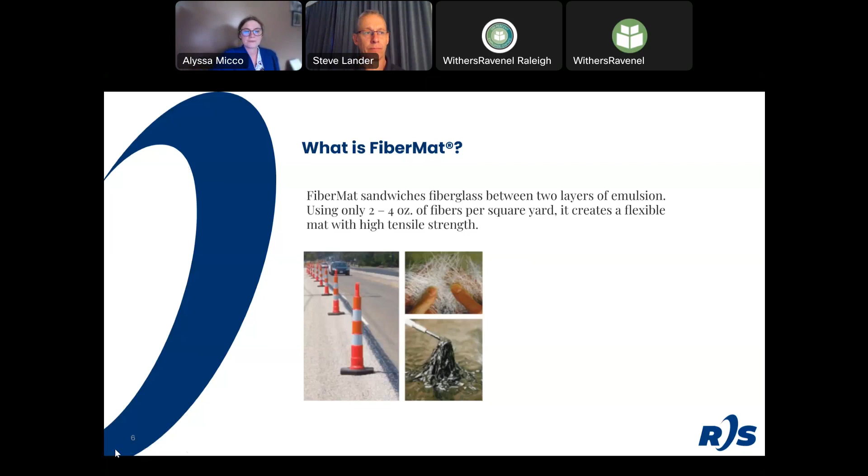So, some applications. Where'd my little button go? There it is. Okay, so what makes FiberMat super unique, in my opinion, is that there's two ways you can use it.

There's the type A, which is a super absorbent membrane, or SAM, and that's just when you have a chip seal as your wearing course. This little demonstration on our left is of a type A, and you can see the emulsion or the binder, the chopped fiberglass, the binder, and then the aggregate. Typically we see aggregate sizes about 1/8 to 1/2 inch, and anywhere in between. Anything you'd typically use for a chip seal, you can use for a type A FiberMat. This is a really nice way to extend the longevity if you have a lot of chip seal roads and want more life out of them.

Then we have a type B FiberMat, or we like to call this a SAMI, which stands for super absorbent membrane interlayer. This is when you use the FiberMat as an interlayer instead of a finishing course. So again, you're going to have your emulsion, fiberglass, and emulsion sandwiched together, and some aggregate, but this is not applied as heavily. It's applied between 15 to 17 pounds per square yard, so it's kind of salt and peppered onto the emulsion layer.

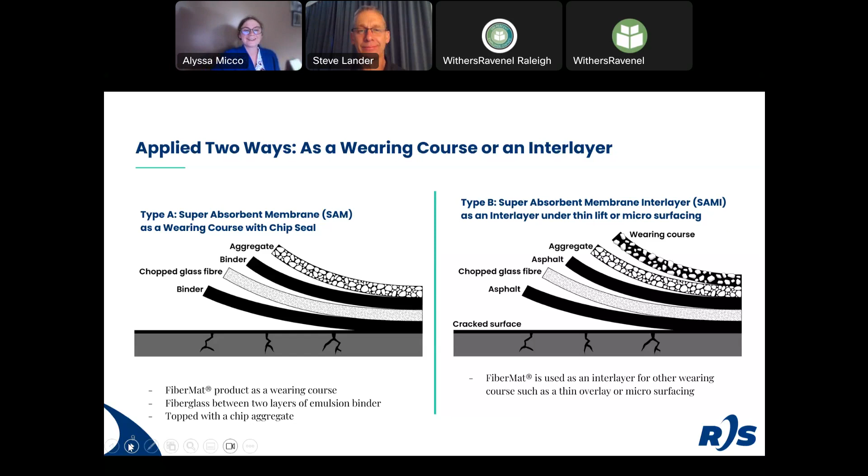I want to talk about this case study. This is about a 13-year-old case study done in Murray, New York, and it speaks for itself. This was done with a type A FiberMat, so this was FiberMat as a finished course. There is nothing on top, no thin overlay, no Micro.

So this study indicates it's time for a shift in thinking. Instead of talking about your cost per square yard, we're going to talk and think about your equivalent annualized cost. If you guys want more information about that, you can email me after the presentation because there's a spreadsheet I can send you, with most of the information coming from roadresource.org. But let's just dig into the case study.

Standard has over 10 years of performance data of Groth Road in Murray, New York. The project was completed in the fall of 2003 and provided us with a side-by-side proving ground in a location with cold winters and warm summers, so we have a lot of freeze-thaw cycles in Murray, New York. Serving as a control lane, one was treated with a chip seal with a life expectancy of 5 to 7 years, and the left lane was treated with a type A FiberMat with a life expectancy of 7 to 10 years.

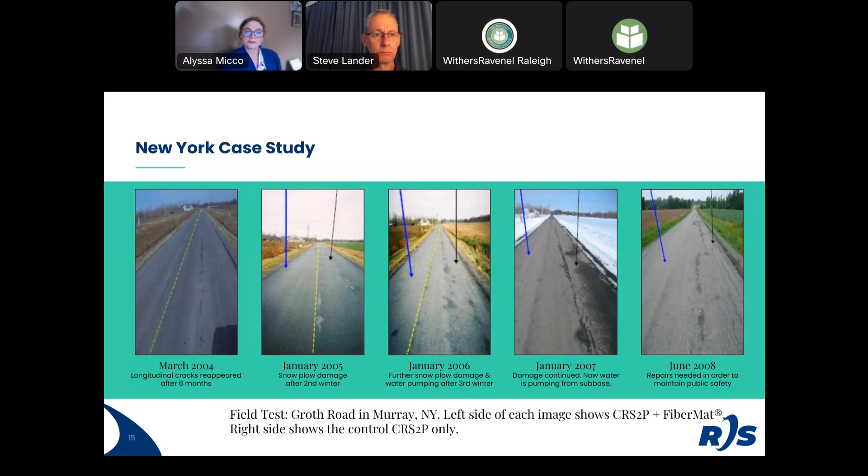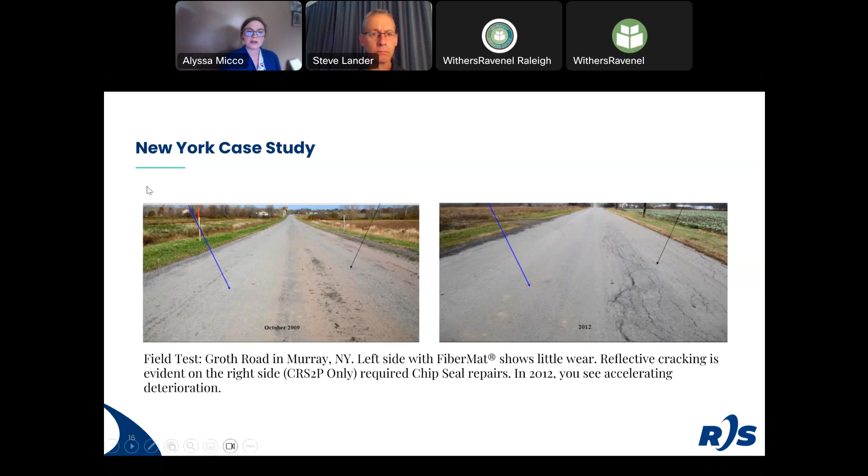So our left lane, the application started in 2003, and the emulsion we used was a CRS2P and FiberMat. Then in 2014, we got a Nova chip and some minor crack seal. The exact cost I'm not sure offhand, but I'm sure it's far less expensive than our right lane, which started in 2003 with a CRS2P.

Then in 2009 we needed to do chip seal repairs, and then in 2014 we did Nova chip with some crack seal. So just the addition of this chip seal in 2009, we totally avoided with the FiberMat, which is going to save your agency money in the long run, which is good news all around.

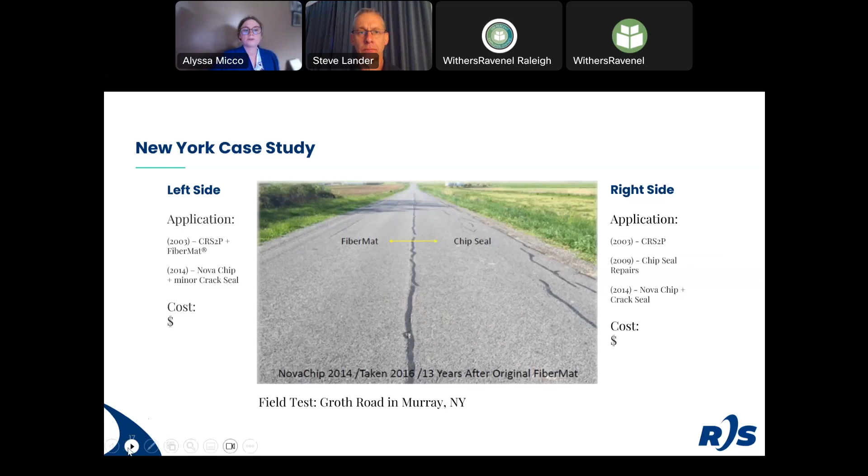We have some additional research available upon request. It's the full in-depth study from Texas A&M with their TTI overlay tester. It's a lot to look at on a slideshow, so if anyone would like any additional research, please feel free to reach out.

We saw improved cracking resistance 3 to 4 times more than our control sample. And larger FiberMat samples, with a larger interlayer, survived 14 times longer than our control samples did. So if anyone wants the full in-depth schematic of the TTI overlay tester and everything, feel free to reach out and I'll send that to you.

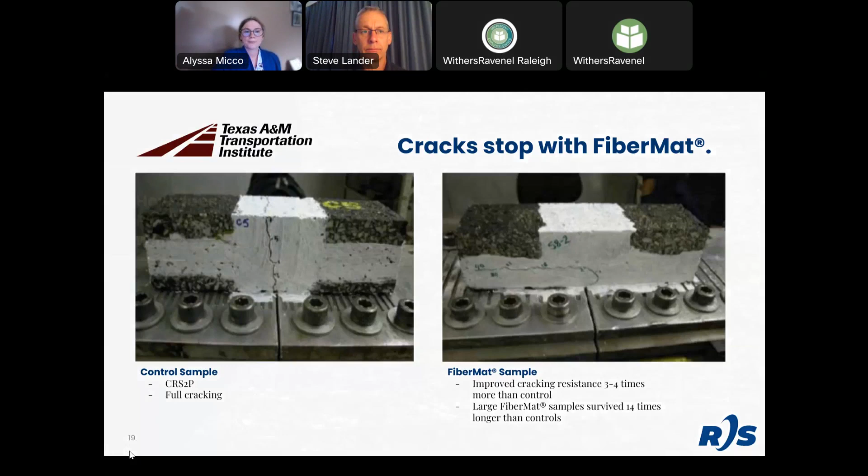So we talked a lot about the cool side of FiberMat, the case study, what it is, but how does it work?

Well, it starts with your site selection. A good road candidate for FiberMat is roads of all traffic volumes.

In 2005, I want to say, NCAT used FiberMat as a test subject on Highway 280, which is a high ADT road. It connects Opelika, Alabama to Columbus, Georgia. There's a lot of traffic from the airport going into Auburn, and a lot of heavy truck traffic because of logging routes. They put FiberMat on 280 and it withstood a lot of traffic.

Then in 2023, I was in Opelika, Alabama, and we put it on State or County Road 179. It was a lower traffic volume, but it served its job and it is still crack-free to this day.

FiberMat's great for going over concrete or milled surfaces, and you don't need a scratch course for it to go over like you would with a typical geotextile. We always recommend any potholes or cracking larger than an eighth of an inch, and any wheel rutting, should be corrected before the FiberMat goes down, because FiberMat's going to increase your tensile strength and flexibility and reduce reflective cracking. It's not going to fix your base issues because it is a surface treatment.

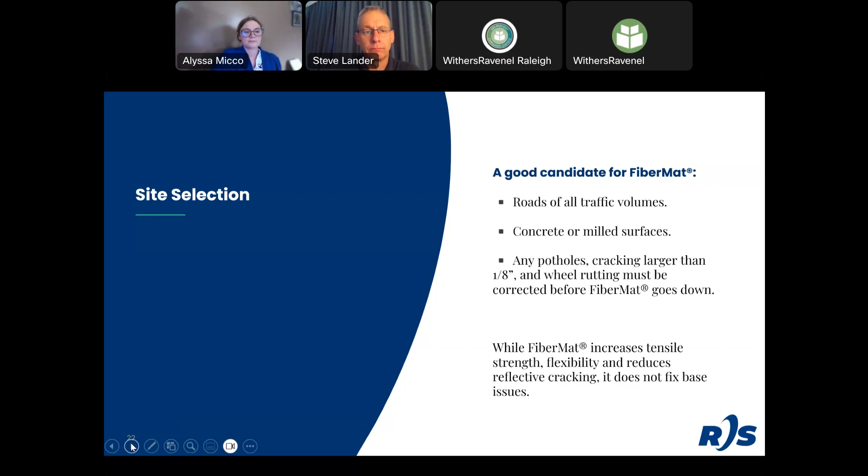How is FiberMat made? Well, the FiberMat machine simply sandwiches the fiberglass in between layers of emulsion. There's a computer-guided system that cuts the fiberglass mat to its ideal size. Then the aggregate is immediately placed and rolled over top.

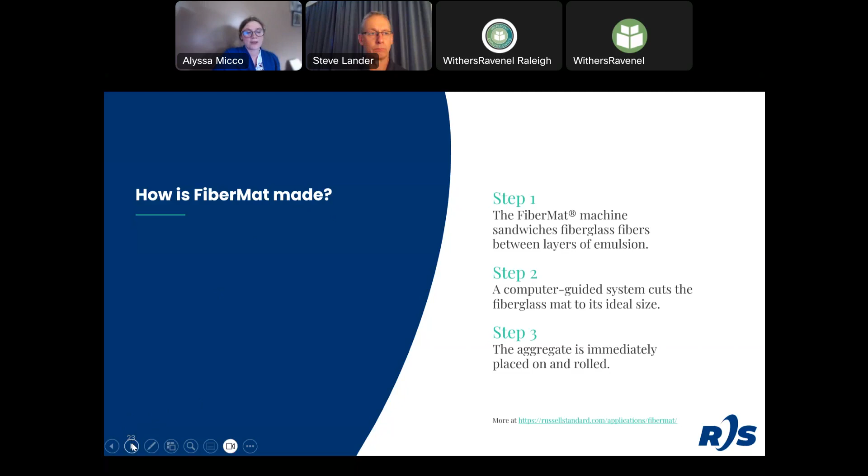We always recommend, if you're working in North Carolina, following NCDOT's best chip seal practices because they are tried and proven true and a great complement for FiberMat. If you guys want to get more in depth, follow the link for Russell Standard's site, hit all applications, and scroll to FiberMat - there's a video that goes in depth over cutting bars and the computer-guided system.

I have this screenshot from the video just to explain the specialty of the FiberMat buggy. So we have a spray bar that delivers half of your emulsion, then cutting bars, or cutting wheels, for the fiberglass, and then a second spray bar that gives the second half of the CRS2P or CRS2L emulsion. The shot rate for FiberMat is about the same as your normal CRS2P, but this system just breaks that in half so that the fiberglass gets covered up.

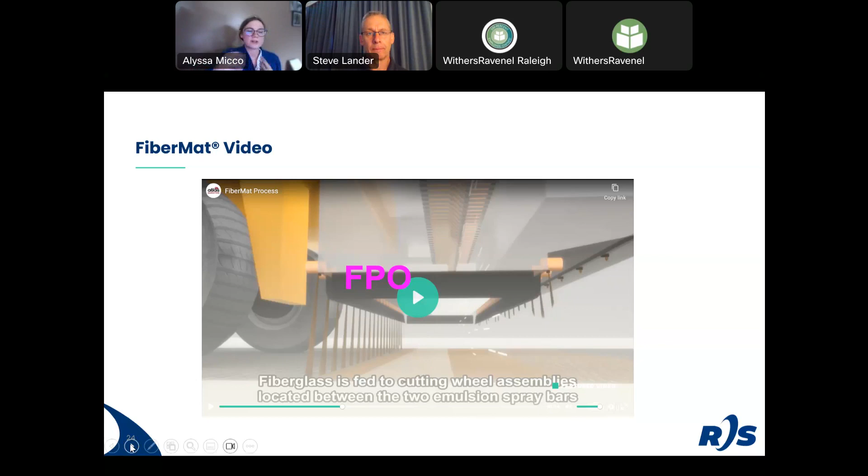So what materials would you need? Anything that is a CRS2P, 2L, CRS1P, or 1L. I know some states don't necessarily use polymer modified, and that's okay - we use latex modified in North Carolina, and it works just as well. The aggregate typically used is about 1/4 to 1/2 an inch. The fiberglass we will provide as contractors.

The FiberMat machine, which we provide as contractors, and cooperating weather conditions. Since FiberMat is emulsion-based, you do not want to do this when it's raining, and you don't want to do it with the chance of freezing. You just really want to follow best chip sealing practices when handling FiberMat. You want 48 hours between your rain event and putting it down - that way it has time to cure and set, and the stone really gets embedded.

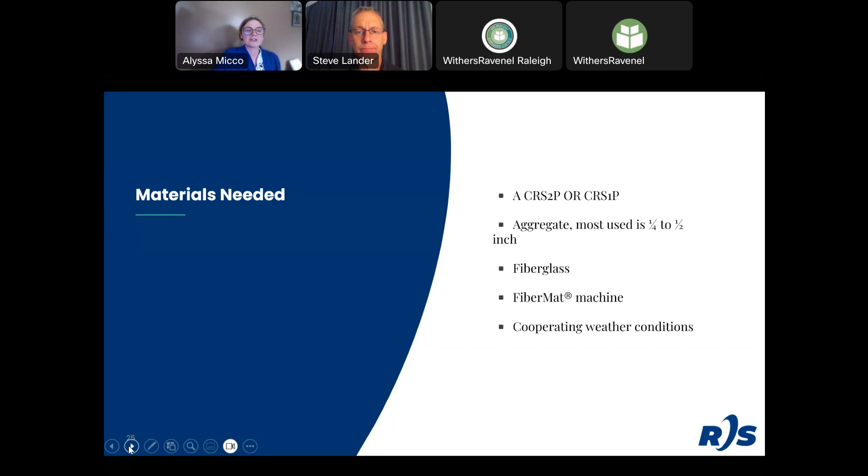So here are a couple of our completed jobs that we've done. One of them's from Pennsylvania, and there's a few from North Carolina.

But if you guys want to keep it local, here's some jobs that we've done in North Carolina. This was in Mecklenburg, North Carolina, on Fullwood Lane. It was about 12,800 square yards, and this was a type A FiberMat, or a SAM. This was just a small job, a little over half a mile, with 2 sections on Fullwood Lane. The first was about 2,466 feet, and the other one was roughly 500 feet. And it's a 3-lane section with a long turning lane, and it was 26 feet wide, which is why it was so many square yards.

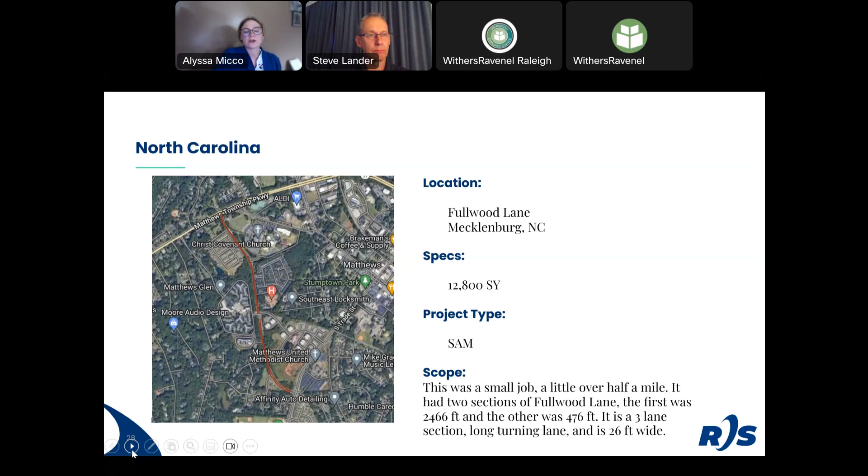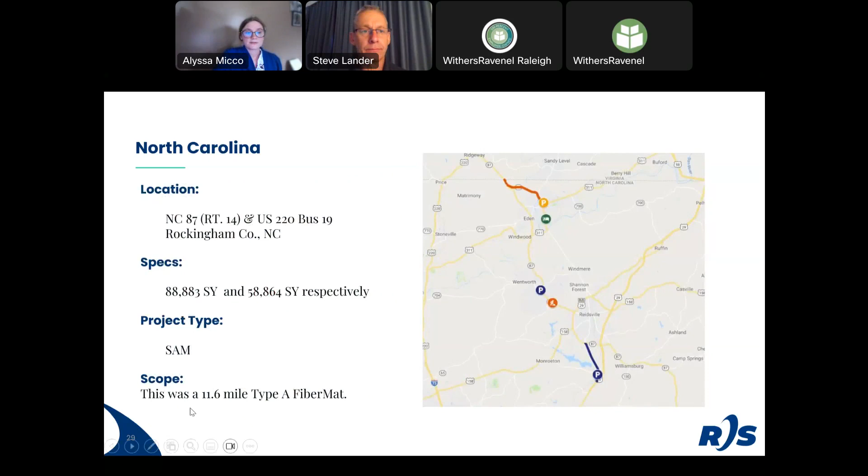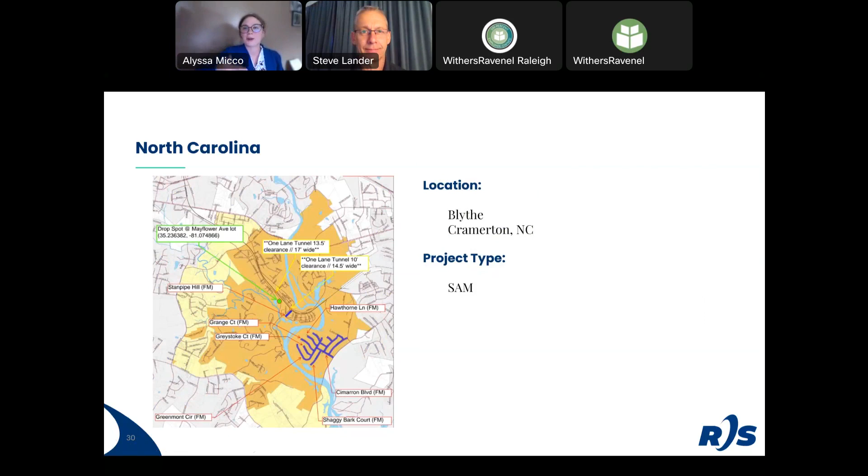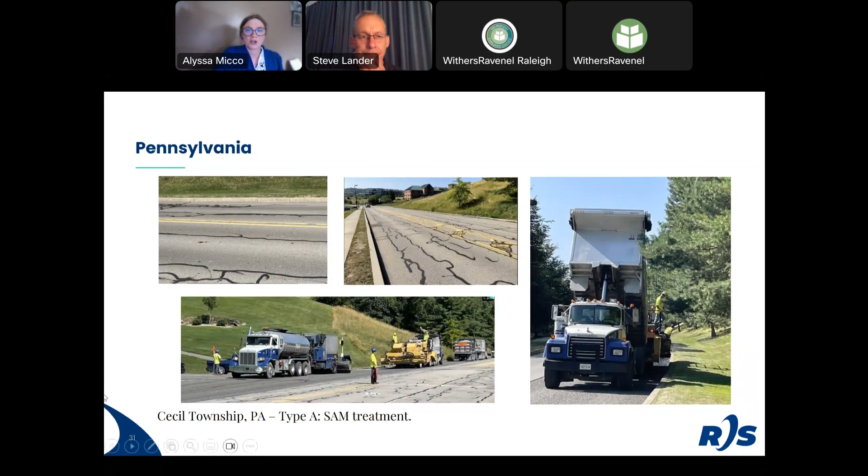And this is a job a little closer to my home, in Cecil Township, Pennsylvania, and this was a type A FiberMat. As you can see, we prepped the road by doing our crack fill. And this picture right below, that is our distributor pulling the FiberMat buggy, and then our chipper is right behind. We did our stone on top, but we took it up a notch for this job because we did a fog seal on top, and it gives that look of a hot mix road without the expense of a hot mix road.

Hey, we had a question about the NCDOT projects. Was there a pavement design used for the FiberMat? Yes, we do have pavement design. The one I have off the top of my head on my computer was the one in Blythe. We had a design formulation all set up to go. The other jobs, I'm not sure, because it's a spreadsheet, I don't know if we just plugged in what we were using. But if you need information on that, I'd be super happy to get it for you.

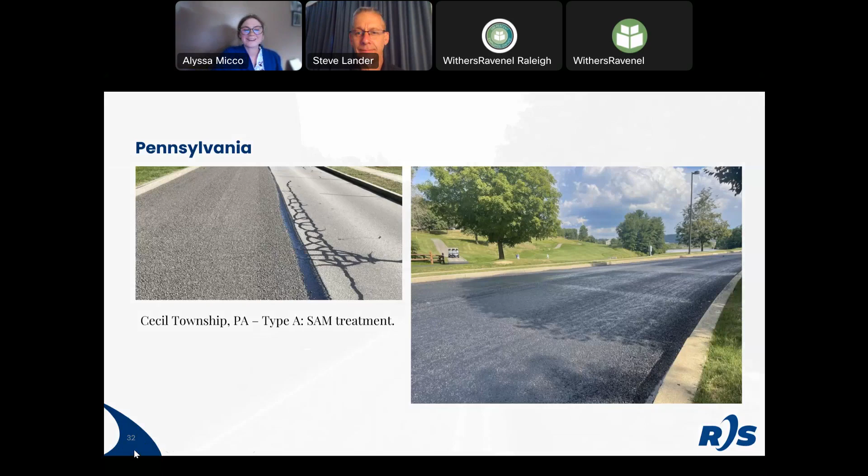I'm just going to go through a summary of benefits of FiberMat. FiberMat is long lasting because it greatly reduces your reflective cracking and extends the life of a chip sealed road for 10 years. We say 10 years because that's a good ballpark, but we have a road in North Carolina, in Nash County, Old Route 64, that was done in 2013 and it is still crack free to this day.

And it protects against snowplow damage. Now, I know not a lot of folks down south see a snowplow, but I know parts of North Carolina get more snow than I see.

FiberMat is cost effective. So typically what we see in Pennsylvania when they go to redo a road, we see a mill and fill, which they wait for it to get to the absolute worst before they can't do pavement preservation anymore, so they do a mill and fill. But if you swing a couple more dollars per square yard into a FiberMat, you would end up saving $582,000 instead of letting it deteriorate to the point of a mill and fill.

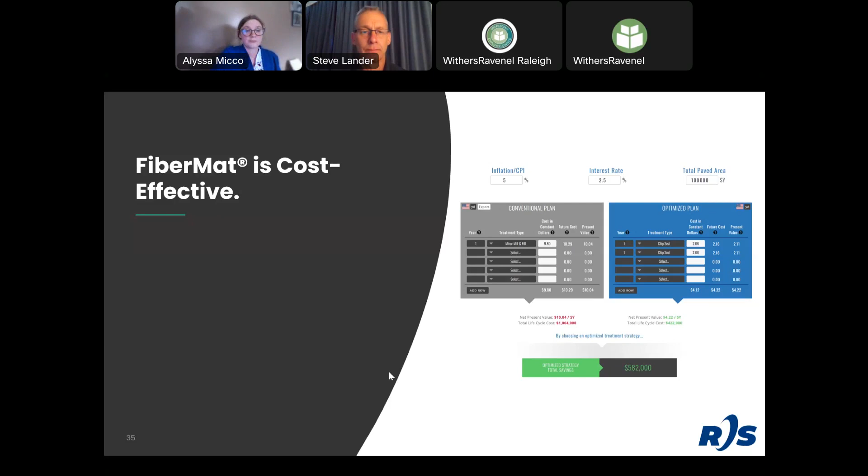FiberMat's versatile. You can use it on roads of all traffic volumes. It works great with concrete and asphalt. It's effective in warm and cold weather climates. It can be applied in two ways, as a wearing course or as an interlayer.

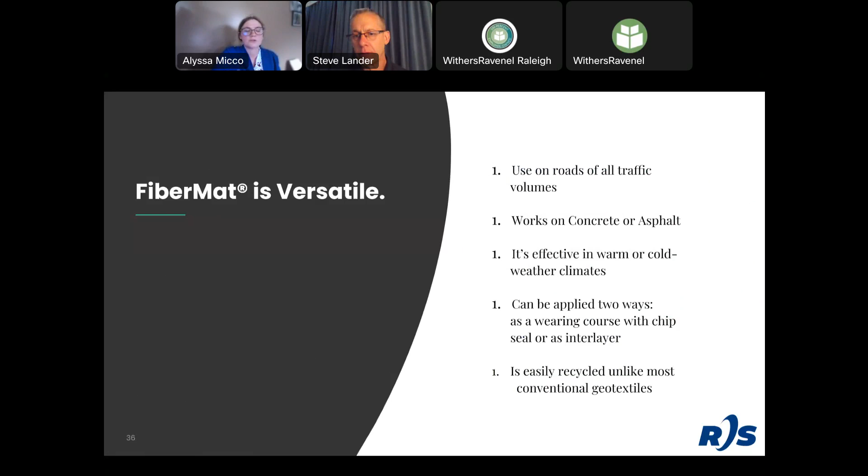And it's easily recycled with conventional equipment, unlike a lot of paving fabrics. So if you guys wanted to rip it up in 10 years, it is totally safe to use. And it's quick. There's a fast application process because it's emulsion based, very much like a chip seal. You can get slow moving traffic on it in 15 minutes. We always say 30 minutes because sometimes if the humidity's high, it might take a little bit longer to cure.

Got another question here. Is the time between stone placement and capping with Micro similar to a Cape seal? And is there much loss of aggregate on the shoulder or gutter pan? So for the timing with Micro, it would be the exact same timing as it would be for a Cape seal. As for stone loss, I will have to look into that and get back to you.

So I guess you sweep when you place the stone, roll it in, and then probably run a sweeper on it just to get any loose stone. Typically, we wait about a week before we come through and sweep, just so we can use cars to your advantage. But I will get that information to you, Steve.